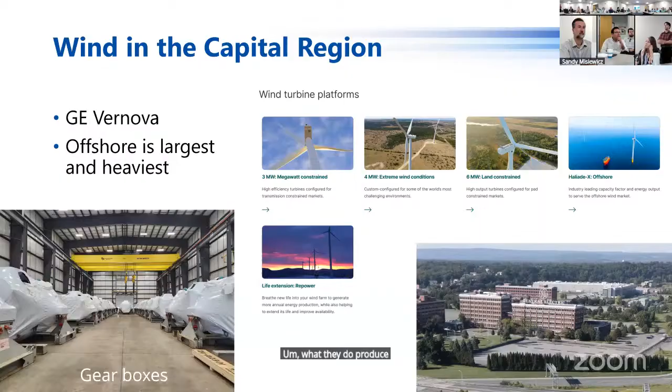And they produce a couple of different parts here. They don't produce the actual blades for the turbines. What they do produce are the nacelles, which are the hubs, the main housing, shown on the left, and then the gearbox and the drivetrains, on the right. Those are basically just copper wire wrapped around and around each other. Both of these are very large, obviously, but they're not taking up the entirety of those truck beds.

The reason they have to be on such large trucks is because of the extreme weight of these products. They need to be dispersed over a bunch of axles, and even then, it's a lot of weight on each axle. The largest of these can weigh over 150 tons, which is 300,000 pounds - extremely large. And hundreds can be produced each year, but it's very demand dependent.

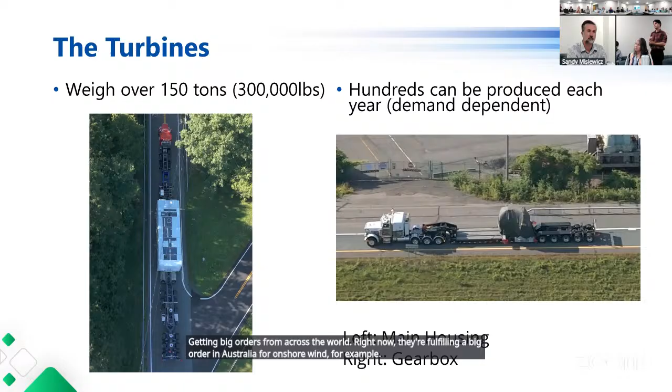GE is not just producing a ton of these to sit in warehouses waiting for orders. They're doing some of that to be ready for large orders, but it really depends on them getting big orders from across the world. Right now, they're fulfilling a big order in Australia for onshore wind, for example. That brings us to the other end of the equation, which is the Port of Albany, which again is a really big benefit to our region. The Port of Albany has a heavy lift capability that's kind of unique for ports.

Those two cranes on the bottom left can lift a massive amount of weight that many ports cannot handle. And so they allow GE to load all of these parts onto boats that can then be shipped all over the world.

The port also has the new 85-acre Beacon Island site, which was originally planned to be used for offshore wind part manufacturing, storage, and loading. But due to the federal environment right now, that was put on hold. So the port recently closed a request for expressions of interest for some new development at that site.

But the port is a huge benefit to our region, just like GE is. So trying to connect these two big benefits to our region is really important.

If you're trying to get from GE Vernova to the Port of Albany, just in a car, any one of us, it's going to be about 20 miles. It's going to take about 20 minutes. You're going to mostly be on the interstate, taking 890 to 90 to 787, and then you're at the port. It's really quick, really painless.

That is not an option for these over-dimensioned loads for a variety of reasons. So this map, there's a lot of colors, a lot of lines. We'll break down each of them, but there are several options these turbines have to get from GE to the port, each of which has its challenges, but also its advantages.

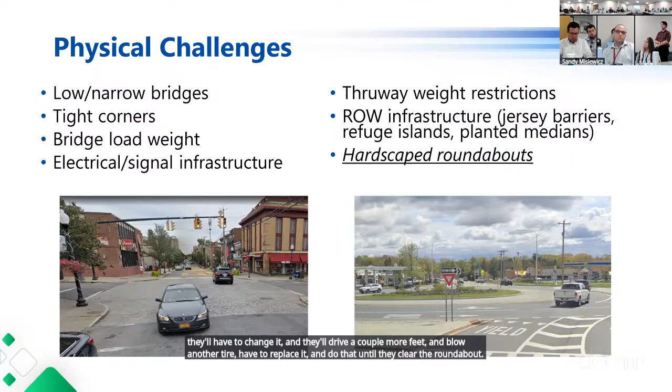The other group of challenges are more logistical. It's very common for municipalities to not love having trucks go through their regions. Trucks are large, they're noisy, they get in the way, and all the problems that people associate with trucks are exacerbated by these super dimensioned loads.

So people don't love having them come through their areas. There's also local requirements like time restrictions. It's not uncommon for municipalities to say you can't come through between 9 and 5, or you can only come through between 9 p.m. and midnight. And those often don't line up, so you can get to the border of one municipality, then have to wait 4 or 5 hours until you can go through, and kind of do that until you make your way down the route. Bridge downgrades are also extremely common, like we spoke about in physical challenges, since bridges have a certain weight they're permitted to carry.

And in a region like ours that has lots of bridges and lots of aging bridges, we just got through the TIP process, and a huge amount of money went towards just bridge replacement and repair. As these bridges age, they have lower weight requirements that they can handle. So even if you have one route that's working for a year or two, after a couple of years of these super loads going over them, the bridge may be downgraded and the truck can no longer cross that bridge.

The other emphasized item on this list is the escort requirements. This is what Dagan Trucking also identified as a large barrier in New York State. For pretty much any super dimension load, it requires between 3 to 5 police officers escorting the vehicle at all times. This compares to most other states, which require 1 or 2. The New York State Police also, if you cross their subdivision boundaries, have to change which group of police officers are doing the escort. The police officers only have a certain amount of hours they're allowed to do the escort, so there's a lot of function turnover, and it costs tens of thousands of dollars for the trucking companies to have these police escorts.

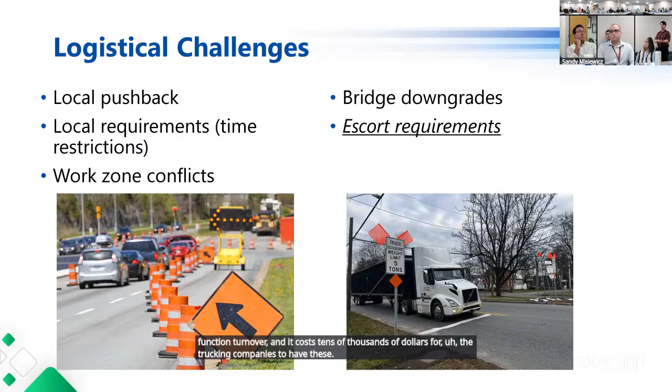So on the next slide, we will have a little video before we play it. You can see following the truck, there are 3 vehicles. 2 of those are just the regular blocker cars, they have the signs that say over dimension. Then that 3rd vehicle is a police vehicle. So Sandy, if you could play the video.

There are obviously benefits to having these police escorts. It makes it so they can guide traffic easier, and if there's any problem, the police are there to respond to it. But the trucking companies would say that compared to other states that have 1 or 2 police officers for the whole route, and that's sufficient, so it's really context dependent. 3 to 5, many people would say is excessive for these, especially when a lot of them aren't going through urban areas for other reasons.

Next slide. Oh, just play it again. That's weird. There we go.

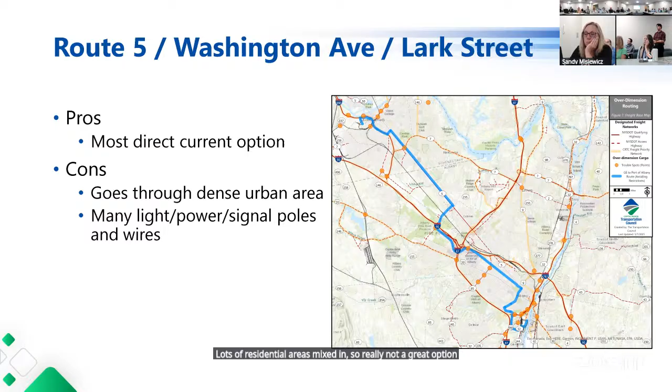Next slide. The next option, you may be saying that yellow or blue line doesn't actually go to the Port of Albany, and you would be correct.

This route mimics the last route as it goes down Route 5, but instead of turning south down New Karner Road, it turns north, goes around the airport up to Route 7, which then takes over to US Route 9 and up to the Mohawk River on the other side of the river.

There's not a port there, that's the main problem. Well, one of the problems, there are a couple. There are specialized low-ride boats that, when the wind turbines get onto them, can lower themselves in the water so they're only an inch or two above the water. Extremely close, extremely precise machines.

Even with that technology, there are a couple of bridges at the lock and at Peebles Island that are too low to the water for these largest wind turbines to make it under. And it's like, gee, can you make your turbines just a tiny bit smaller so they can get under? But maximizing the size of these turbines is how they maximize their profits and energy output, so it doesn't make sense to shrink the size of the turbines.

Another con is that it requires you to move to the water, not at a port. Originally I was thinking they had brought a crane with them and lifted the turbine off the truck onto the boat. Turns out what they actually do is just drive the truck onto a boat, which is very challenging and very precise. You don't want the truck going into the water as you're driving it on, especially since it's not at a port. So it's not a great option. It was being explored, but really does not work all that well.

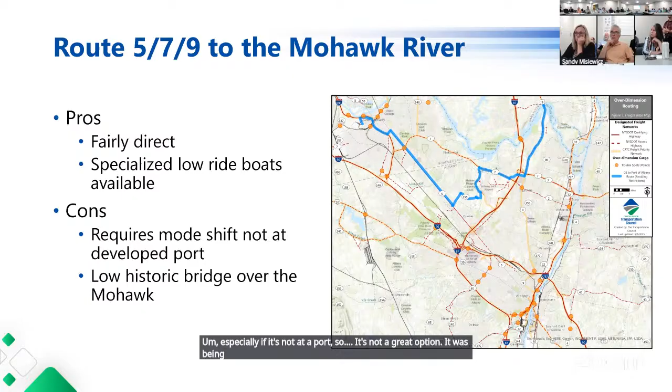Next slide, so then we get to the Catskills route. You can see here this is just a mess of green. This is our general over-dimension routes through the region. The route that was being used most frequently because it has the least amount of conflicts and uses the largest amount of highways. The trucks begin at GE, right up there.

And then they get on Route 7 to go west down to I-88. Then they keep going west there. Then they go off of this map, take a big long route out through the Catskills, and then come back up Route 32, which is kind of in the center, and then right back up to the Port of Albany.

This is great because it's a lot less urban of an environment. There are a lot less physical barriers, but you also have a lot of small rural highways and intersections. So there's not a lot of room for these trucks to be passed by vehicles, and not a lot of room for turns sometimes. The infrastructure out there isn't designed to support as much weight.

So there are places where these trucks driving just on the street have burst water pipes. There are areas where they have destroyed people's yards and had to replace them because the area isn't designed for these large trucks. This route also takes over 3 days and it's a 100-mile route. So you're re-driving 100 miles that shouldn't take 3 days.

But with these trucks, like we were talking about, they move really slowly. They have to make turns really tight, and they also have those local time requirements where they get from one edge of a municipality to another and have to stop and wait until they can move through the next one. So again, this is a route that would work if you had to do it once, but if you're having to do it even once a month, let alone a couple times a week, it does not work very well. The whole time you're being escorted by state police, which racks up a larger and larger bill for these trucking companies.

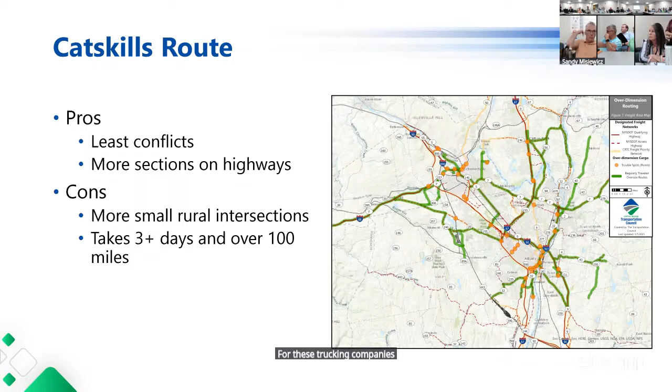Next slide. The ideal route, according to our trucking partners, is the route that you or I would take to get from GE to the port. They would just get on 890, drive down to 90, get on 787, and boom, you're at your port. Doesn't work so well. It's very direct, no residential or commercial infrastructure because it's all on the highway.

But aging bridges on 890 are regularly being downgraded, so they can't support these super loads. There are weight restrictions on the Thruway, specifically the section of I-90 west of the Northway, because that's where toll booths used to be. There are no booths there now, but there's still restrictions for a variety of reasons. And then there's also the ongoing redesign of 787 — it may or may not be an interstate in the future, and an interstate is great for large trucks.

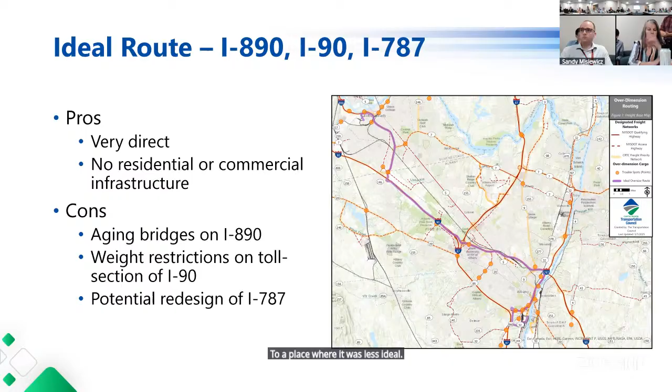But even if this route were to work really well, 787 could be redesigned to a place where it was less ideal for trucks. Next slide. Those are our current options.

So now I'll just real quickly go through the next steps of this project here at the Transportation Council. The first is obviously to find a new route.

At the time of making this slide, we were awaiting descriptions of these trouble spots from our trucking partner. We've started to meet with them to identify those issue spots that we can then analyze to see how they can be changed. We can then draw a new route, or really routes, because like we talked about in logistics challenges, you can have a perfect route, but if a work zone comes up, if a bridge gets downgraded, things are going to change. So it's ideal to have a couple of options.

Even if you have one that's ideal, and a couple that are okay, try and draw a new route that passes through the fewest and easiest to address of these trouble spots. We're not raising a low rail bridge as a part of this project because that would be crazy. We're gonna see what we can do to move a utility pole back a couple feet, buy a bit of someone's property and move their fence back so we're not destroying their yard. Really simple stuff like that we can ideally bundle up into one capital project and then work with those public and private owners to address the trouble spots to create a new route.

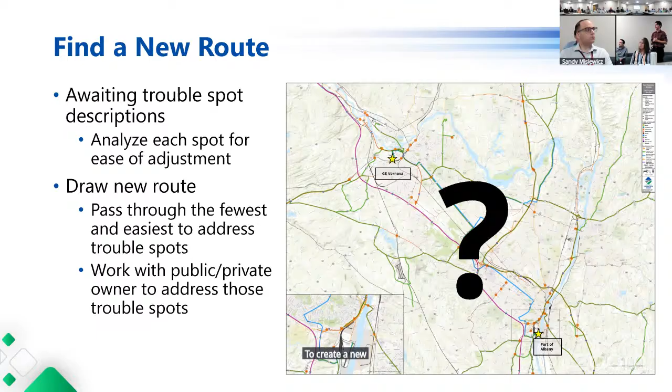Next slide. We can also explore some policy changes to ease the burden of moving these loads around. So working with state police to revise escort requirements, exploring super dimension restrictions with the Thruway for possible permits or exceptions, because there are some permits and exceptions, but they don't apply to all of these loads that are being moved. We can also work to incorporate over dimension considerations into local planning and project requirements, just so that we're keeping in mind these really beneficial economic drivers in our region and not pricing people out because we're making it so difficult for them to move around.

So next slide. We have an upcoming meeting. Some of you here are going to be involved in it. It's going to be next week, and we're trying to bring together as many stakeholders as possible, really to bring this back to people's attention. It was getting a lot of attention when it first came up last year, but it's kind of been on the back burner here and other places for a variety of reasons, but it's still a problem. It's not going away unless we address it.

If it does go away, it's because GE has moved on, which would be a big problem for us. So getting people together to brainstorm solutions and potentially creating a small task force of just a handful of people who can meet semi-regularly to kind of pick up some of these trouble spots and make sure everyone's staying fresh and involved with the project.

So that is all from me. If anyone has any questions, I'm happy to talk to you at the end. You can always send me an email or call. I'm happy to talk to you about it. That is all from me. Thank you very much.

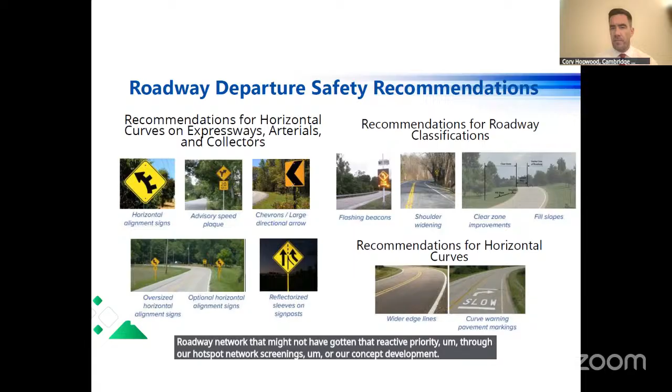And then intersections. We know the majority of our crashes occur at intersections, and the majority of our fatal and serious injury crashes occur at intersections. Naturally, that's where we have the most opportunities for conflict, with motor vehicles and other users mixing at these locations. It's where 67% of our bicycle and pedestrian fatalities and serious injuries occur. I don't think that's a huge surprise, but there's also a lot we could be doing there.

This was also addressed from a systemic standpoint, but was also a huge focus of the concept development and road safety audit locations brought to us and agreed to by the partner jurisdictions. So we're seeing spot treatments of these, and systemic treatments of these. I feel like intersections are going to rise to the top in a lot of our current investigations of priority locations—it's definitely something we want to focus on going forward.

That said, it overlaps a lot with the bike ped vulnerable road user area, so you'll see as we move into that conversation how intersections could be improved as well. I won't spend too much time on all the pedestrian and bicycle related intersection improvements here, so much as there's a lot we can do at intersections that would benefit everyone, whether it's retiming the signal or moving to a stop controlled or roundabout situation. Depending on the type of issue at the intersection, there's a lot of recommendations we can put forward.

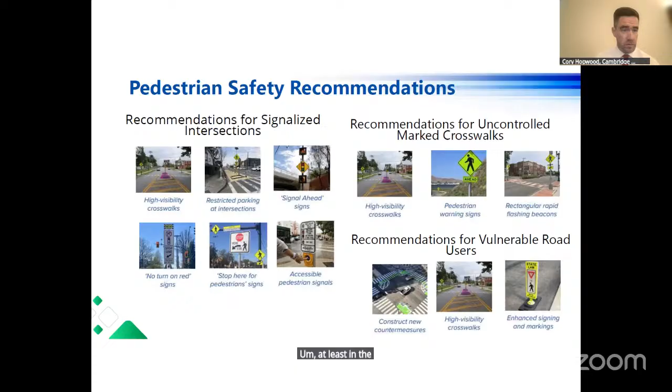Safe road users, again, we're using this general theme to encompass those behaviors that are considered unsafe or more likely to lead to fatal and serious injury. Think about distracted driving, impaired driving, and also specific user groups by age.

Most of the things we want to address as part of this are going to require some strategies around enforcement and education, not just infrastructure improvements, as much as a lot of us deal with infrastructure improvements as part of our daily work. There's a lot we could be doing about educating the general public and giving them the ability to take safety into their own hands as well.

As part of the safe system approach and the safe road users element of that approach, we want to give people that ability. We know it's going to take that comprehensive approach to get rid of fatalities altogether. So giving them that education, giving them that ability to behave more safely and put themselves in safer positions.

Just to highlight that age piece as well, part of the reason we wanted to include younger drivers and older drivers as part of this is that we know when a driver 65 plus gets into a crash, it is more likely to result in a fatal or serious injury. Similarly, we know that drivers under the age of 21, while they have a very low percentage of the overall number of licenses in the region, have a much higher overrepresented number of fatal or serious injury crashes that they're a part of. So we know that's an area that needs to be focused on.

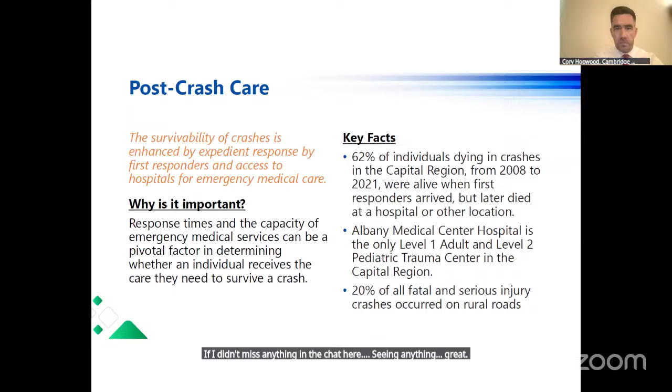So just the last couple of things here for the last couple of minutes. Going forward, to make sure this plan has teeth and is set for implementation, we've put in quite a few performance measures. Naturally, coming from the state level, NYSDOT has already established their required performance measures, and we're definitely going to include those as part of this. But the number of fatalities, the rate of fatalities per vehicle miles traveled, the total number of serious injuries, the rate of serious injuries per vehicle miles traveled, and the overall number of non-motorized fatalities and serious injuries as well.

With that, we are also looking into a couple of other important contextual aspects. We're going to look at fatalities and serious injuries and their rate, but break that out by functional class, which we could later break out by context classifications, ownership, that type of thing if we decide that's needed. But really getting that better understanding of on what types of roadways we're seeing improvements or increases and decreases in our fatality and serious injury rate.

Similarly, getting a ratio of those fatalities and serious injuries per the population, specifically in the equity priority areas that were developed as part of this and other planning efforts in the region, and comparing that to the region-wide average overall. So seeing if we have a discrepancy and an overrepresentation going forward, or can address that overrepresentation of fatalities and serious injuries in those equity areas in the future.